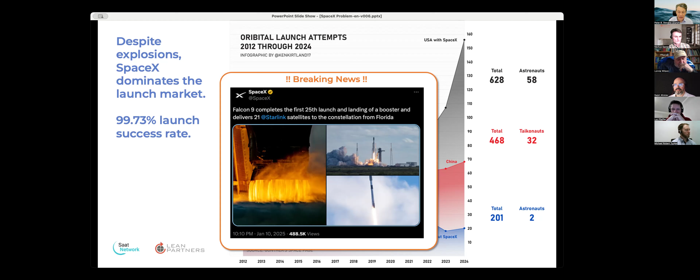The number of successful landings or successful landing attempts is only slightly below that. They're up around 400 launch and landing attempts, with, I don't know, they had a string of around 300 successful launches and landings before they had an incident again.

So what I'd like to do is explore, first of all, what's special about SpaceX? How do they do things differently? What are the guiding principles that we might be able to apply in our work? And finally, what do I think you need to do, or what do I think will help you accelerate to keep up?

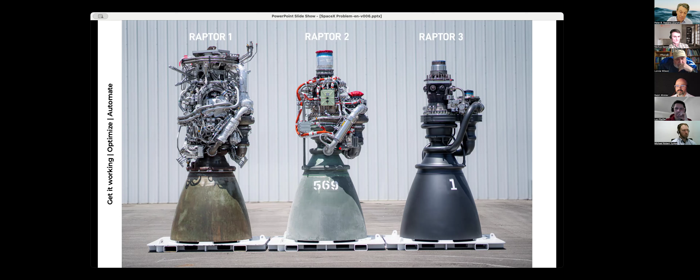and to get it working reliably. Raptor 2 was the result of many, many years of optimization. And then Raptor 3 is saying, it's actually the same design as Raptor 2, but all of those pipes that are hanging on the outside, well, they're now internal to the casing. And then a lot of this is 3D printed. And so this is designed to make it more efficient to manufacture. And that's the basis that they're going to start automating on.

Okay, so how can you accelerate? And I really think the key here is the leadership in your organizations, which is both visionary and effective. So what do you have to do? Well,

both SpaceX and Tesla are characterized by very long-term vision, well beyond the profit goals of this quarter. And what they're doing today is there to support the long-term vision. Now, obviously, they have to execute. They have to be able to maintain focus on their long-term goals. At the same time, we get new information. Some things don't work the way we intended. So we need to be able to respond to change effectively.

In the case of SpaceX, they realized the launch market was not going to pay for their ambitions to go to Mars. So they had to come up with a plan B. That plan B became Starlink. And Starlink has revolutionized the communication industry, which is in turn revolutionizing everything from disaster relief to military engagement.

And so what you have is a very, very close collaboration between what's happening at the strategic level, what's happening at the tactical level, and what's happening at the operational level. And in fact, pretty much everybody at SpaceX or Tesla is expected to be in the factory, working at the factory. And then finally, as leaders, we are also creating the environment where all these other things can happen.

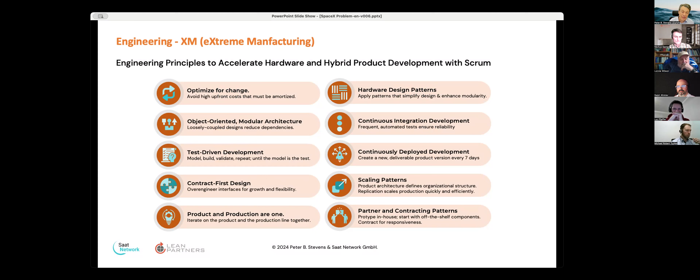Now, one of those possible tool sets is extreme manufacturing. Extreme manufacturing emerged independently of SpaceX, but encapsulates many of the principles that SpaceX is applying. Now, I'm not going to go into all of them, but I do want to take a look at this concept of test-driven development. Okay, first you create a model, then you build it, then you validate it, then you repeat, you keep going until the model is the test.

So let's look at the SpaceX test program for the upper stage known as Starship. Now, when SpaceX made the switch from carbon fiber to stainless steel, they had never worked with steel before. So after they had acquired some land, they decided to put the plant on that plot of land in what's now known as Starbase, Texas.

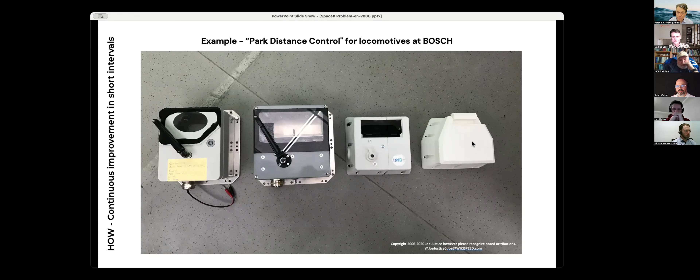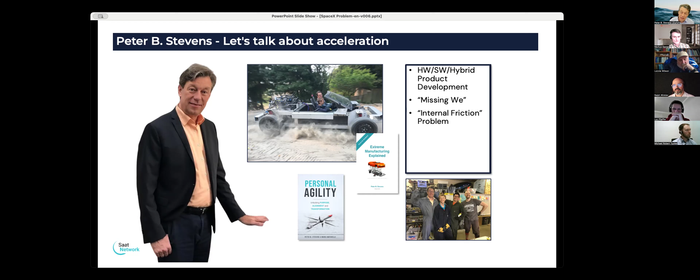So anyway, that's kind of a look at how it could be done. Can you do this? I think Bosch brings the proof that it can be done, even in Europe. I hope I've whetted your curiosity. We'll have some discussion at the end, but I'd like to invite you to reach out to us and start a conversation. For me, the focus is really this hardware, software, hybrid product development—organizations who feel there's a missing 'we' in the company, too much internal friction within the organization. Obviously agile transformation is a topic, especially if it's not going the way you like, and I do a lot of advanced workshops on agility. So with that, I would be very delighted to have a conversation with you. And I will pass the talking stick back to Markus.

I think I hand over now to Ralph. Ralph is with the second use case, and yeah, this is a car company, I guess.

Yes, it is. Good evening from my side. I'm very pleased to share some insights about Tesla. My name is Ralph Winkler. I'm a lean expert with a strong background in industrial engineering and industrialization. I caught interest in Tesla pretty early, as I actually tried to apply at Tesla in 2007. I already prepared a CV but never sent it, because I met my wife here in Germany and decided to stay. So maybe a missed opportunity, I don't know, we'll see. So,

The topic for today: I will discuss and show you why we think the automotive industry has a Tesla problem, or in other words, Tesla presents a significant challenge to traditional car manufacturers, and I want to share some of our insights.

What to expect? I want to address the elephant in the room. I want to share some of the results that we can see at Tesla, and then do a brief look under the hood and show you two examples I prepared to illustrate Tesla's unique approaches that lead to their tremendous results.

First and foremost, as a lean expert very familiar with Toyota, the mother of all production systems, I found it notable that Toyota mentioned they were really impressed when they did a teardown of the Tesla Model Y. They stated they saw a real piece of art under the skin, and also mentioned they were not able to do the same right now. I was really surprised that they admitted they could not do this, and they were amazed about the innovative design they could see there.

On the other hand, we can see the numbers in the comparison of assembly hours: approximately 30 hours for the Volkswagen ID.3, compared to around 10 hours for a Tesla Model 3. So Tesla is more than 3 times faster than Volkswagen.

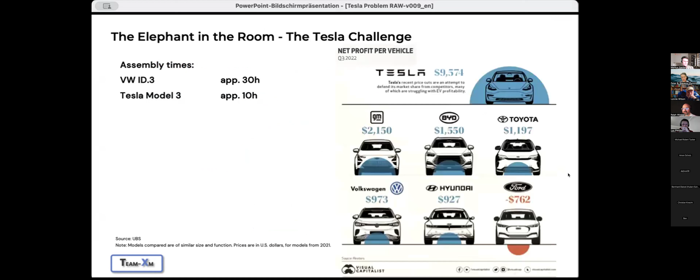When we look at the profit margin per car, Tesla is still the benchmark, even though they have slightly dropped in recent weeks and months. What's also interesting is that Chinese car companies are catching up pretty quickly, and Chinese OEMs are stating that they no longer benchmark German manufacturers, but take Tesla as their reference and try to copy and mimic what Tesla is doing.

So that's pretty interesting. Let's have a look at the selected approaches. One thing already mentioned is that Tesla and SpaceX use really ambitious, meaningful long-term targets. Tesla's mission statement is to accelerate the world's transition to sustainable energy, and only the midterm vision is to be the best car manufacturer in the world. This is pretty meaningful, and maybe attracts the right kind of people to work there.

But they also use some methodologies to derive more tangible midterm targets that are still very much out of the box. There I see a similarity to Toyota's True North thinking. The two approaches we can observe with Tesla are the so-called idiot index and first principles thinking, which they use to derive more tangible, out-of-the-box targets to align the whole organization.

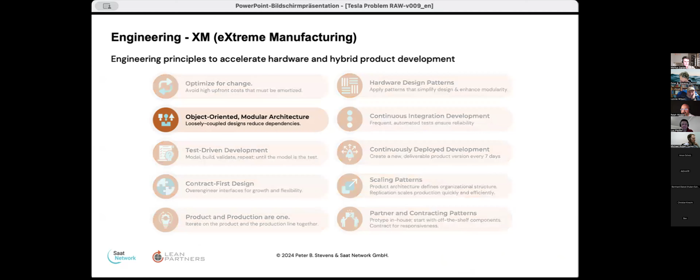Based on these ambitious long-term goals, sub-goals for product and process are derived at Tesla. This isn't completely new, but it's very interesting to see how well they use it. Among the 10 principles of extreme manufacturing, I want to emphasize object-oriented modular architecture. Tesla took inspiration from Matchbox cars, questioning why not build cars as efficiently as Matchbox cars. They took this inspiration from toy cars and figured out there are just 4 essential modules that are assembled at the end, then tried to apply this to their car production.

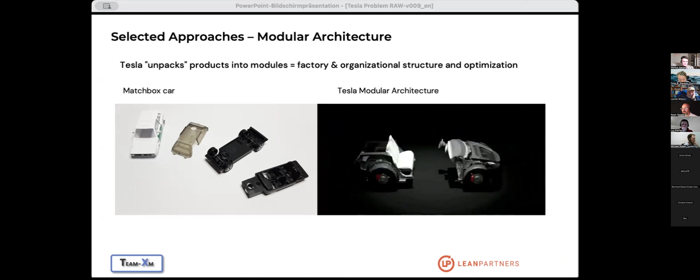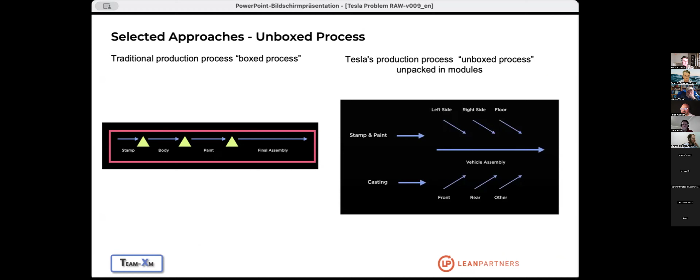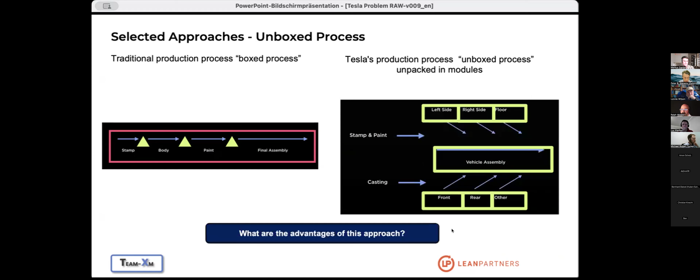By translating this into a production process, they developed a pretty unique technique for car production called the unboxed process. If we compare a traditional production process, like shown here on the left side, a so-called boxed process, all the value-adding steps are in one line in one box. The unboxed process from Tesla is like they unpacked the production process based on the modules they defined, creating a more fishbone-like production where they can produce modules in parallel, achieving some advantages with this approach.

I will show you some of the advantages. The first is free access to the product and shorter distances. On the left-hand side, you see a traditional interior assembly at Audi, where operators have to get in and out of the body, which is very stressful and not simple.

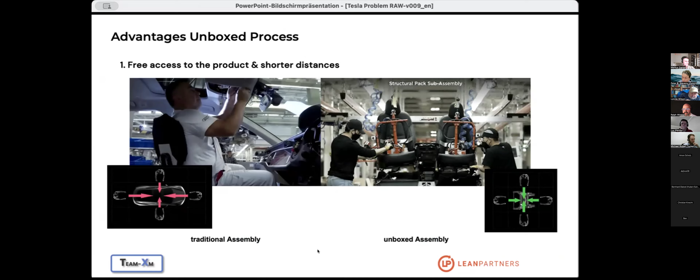We can compare this with an unboxed assembly from Tesla, shown on the right-hand side. One of the advantages is the free access, the shorter ways, the smaller footprint, and also the possibility for automation is much higher in this approach.

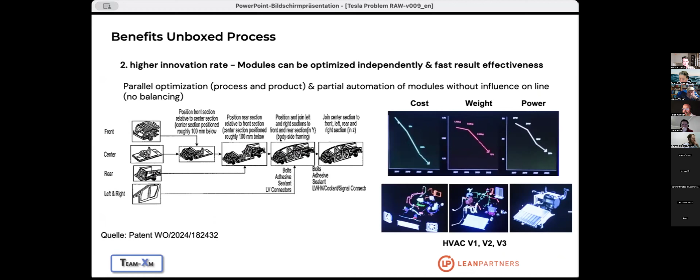The second advantage is the parallelization of the innovation process. Due to the decoupling of the production process, they are able to keep their rate of innovation very high, as they can optimize each and every module in parallel without interfering with other modules or the whole production line, without line balancing at the end. I'll show you some examples of how they brought down cost, weight, and power for some of the modules during the life cycle.

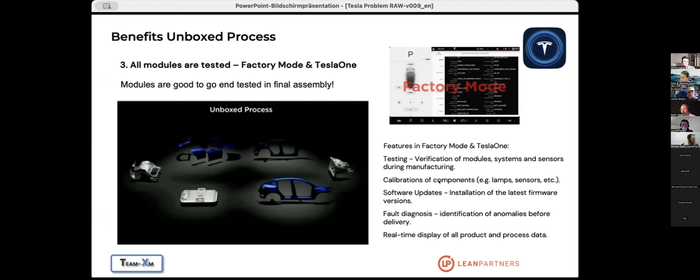The third advantage, and maybe a precondition, is that they use an analogy from extreme programming, so that all modules are tested before final assembly. This is inspired by software development. Tesla ensures that every component is tested early in production. Each module undergoes rigorous testing before being integrated into the final vehicle. The so-called factory mode enables this, as all the modules have computers or controllers that autonomously test, calibrate, and do fault detection.

But Tesla doesn't stop here. They even use the idea of modularization to determine their organization. There's a saying at Tesla that the process is the product, and this has implications for Tesla's organization. They also believe that all problems are a reflection of problems in the organization. So they incrementally work on mimicking the product, process, and organizational structure at once. They work in interdisciplinary teams with designers, engineers, manufacturing, and automation right from the start. This is an agile and fluid teamwork approach using some approaches from Scrum, but it is not Scrum what they are doing, rather agile work.

So that was a brief insight from my side. There's much more detail, much more to learn, much more to adapt.

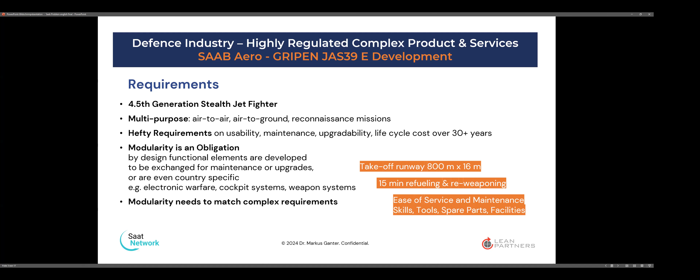The most advanced jet fighter today is Lockheed Martin's F-35, and the project costs are tremendous. The total cost, meaning project and purchasing costs plus maintenance lifetime costs, comes up to 1,500 billion US dollars. Several institutions are mocking that, including financial ones. One unit costs 177 million.

They were comparing the different projects, and Lockheed Martin's F-35 was kind of a technology project. So every supplier was trying to put as much novelty into the project and get as much of the budget. And actually they were exceeding budgets on a regular basis. Whereas Saab was focusing on a very different thing, which is the usability and the operational cost.

So they have a decentralized approach to warfare. This is 3 jets, a very not high-skilled staff. You have weapon systems ready to be exchanged, refueling happening. They have 12-hour shifts. So they are designing a use case for decentralized deployment and are building the product and anything around it for maintenance according to that.

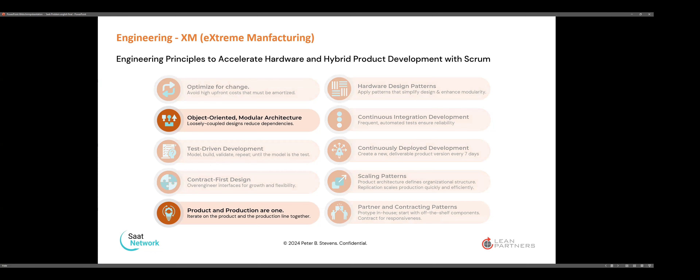Again, we can identify here a couple of systems methods that we call extreme manufacturing. And here I want to focus on the modular architecture, where product, production, and maintenance even become one.

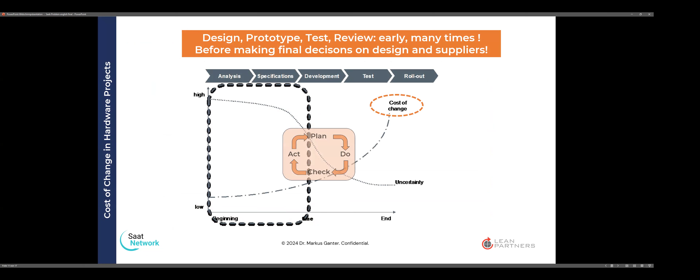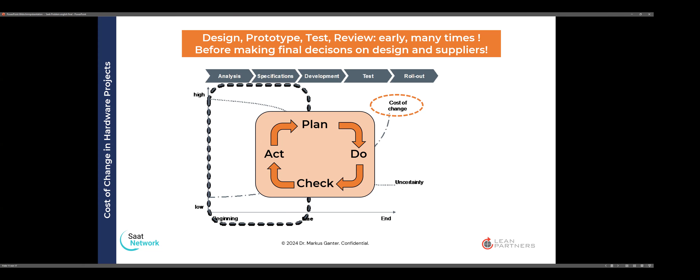So how actually did they achieve it? They did a lot of testing right in the beginning. Once the requirements were clear, they iterated how systems can work together. And there's a certain point in a project where you have to freeze things, where the cost of change really rises dramatically. They paid attention to that.

Plan, do, check, act, that's the lean word for it. Design, prototype, test, review, inspect and adapt may sound familiar from the agile people. And that's also my personal journey.

Looking at lean, starting maybe with lean development, being documented in the 90s. And looking at what extreme manufacturing is, there are a lot of similarities, but Scrum could actually accelerate some of the lean principles dramatically.

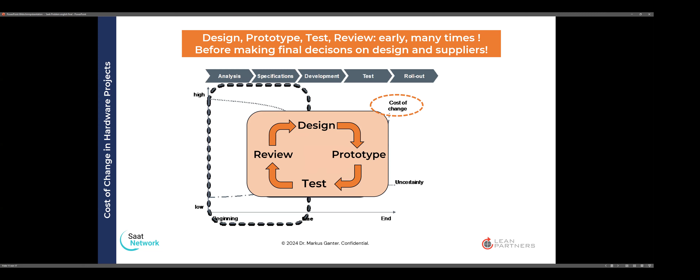So how does this all happen? The product development and the future production, assembly, maintenance, upgrades are happening in one room. The different people from the different modules come together and they can physically understand and discuss iteratively how to approach different things. So it's not separated - design something in 3D models, and then later on try to build it. It's coming together physically.

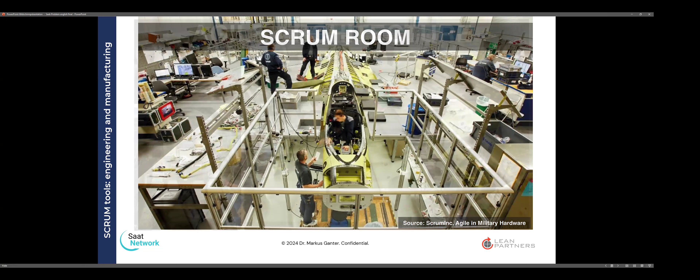The other thing is they break it down, of course. So there's a Scrum of Scrums happening for the engine, for the cockpit, and cockpit systems - electronic warfare typically changes at least every 10 years. So this needs to be modular, exchangeable by definition.

But already in building the core structure, you can identify accessibility to things that need maintenance on a regular basis. And you can define interfaces and openings already, and hopefully physically in the first place, and not doing it in 3D models.

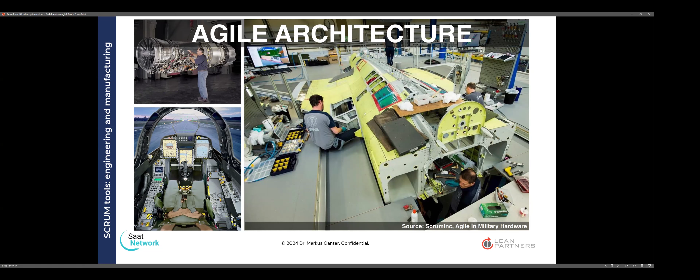They were working in sprint lengths of 3 weeks, and the Scrum meetings were happening every 30 minutes across actually 5 levels. And 2 times a week, there was the executive action team. So any impediments coming up could be resolved immediately, and the teams didn't need to wait to come to a decision or conclusion before continuing their work.

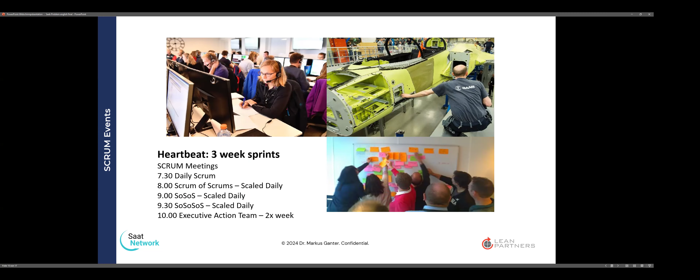So this was the third use case, defense industry, European-based, to give you an inspiration. And with that, I would like to open the discussion.